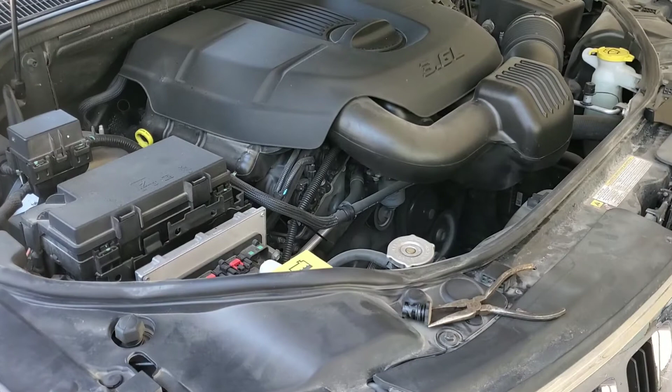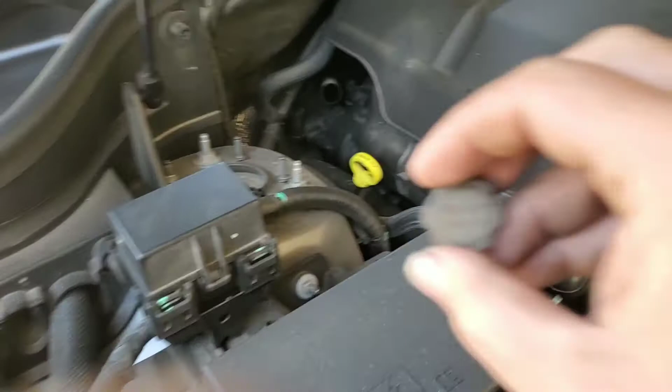Alright, well I got Mama to pop the hood, and you can already see here what I've got going on. There's this plug. Here's where you check your oil, here's where you check your transmission fluid, and it says for dealer only, but today we're the dealer.

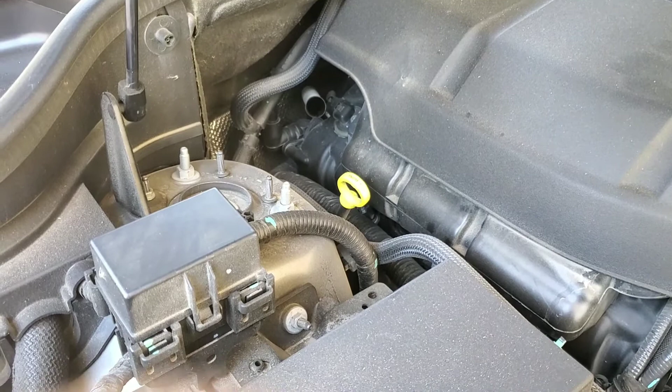So you just grab your handy dandy pliers, grab onto it, make a 1/4 turn, and then it pulls out. Mine popped out pretty easy, but I've heard of people who have theirs not pop out quite so easy.

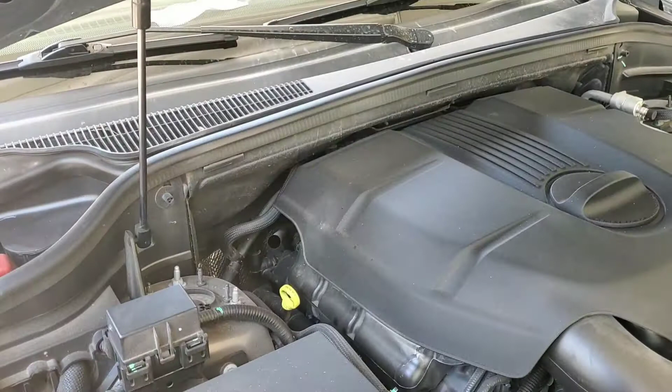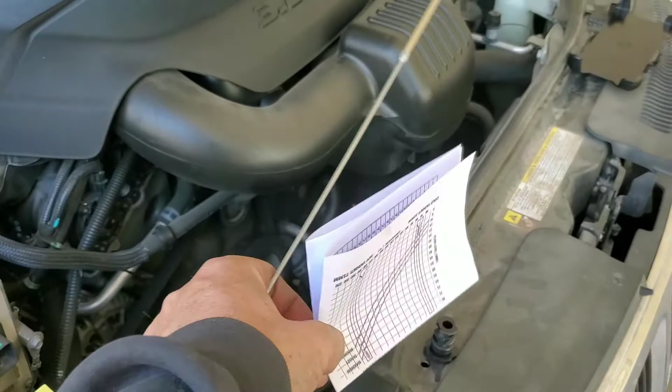Now obviously, as you can see, there is not a dipstick in that hole, but I ordered this one. It came with an instruction, well, kind of a chart. We'll get to the chart in a second. I ordered this one off the internet for $13, and what it's got to be able to read is in millimeters.

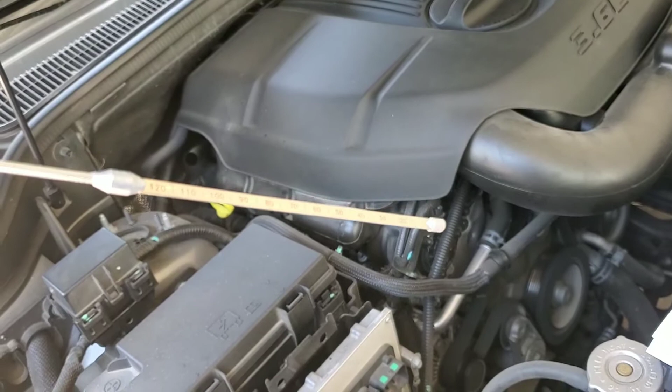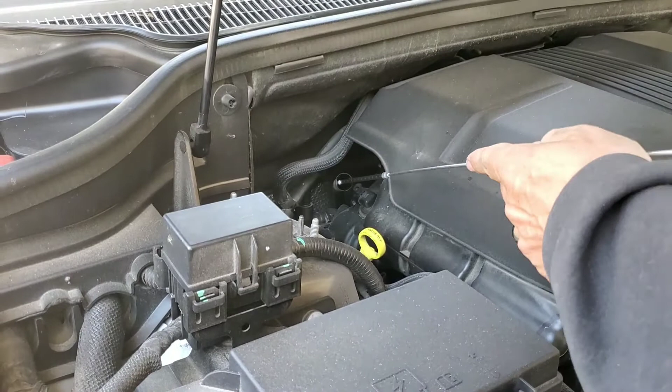So we're gonna give it a good wipe off, and we're gonna stick it down in there. It's got a pretty long cable on it. We're just gonna put it all the way in there until you feel it hit bottom.

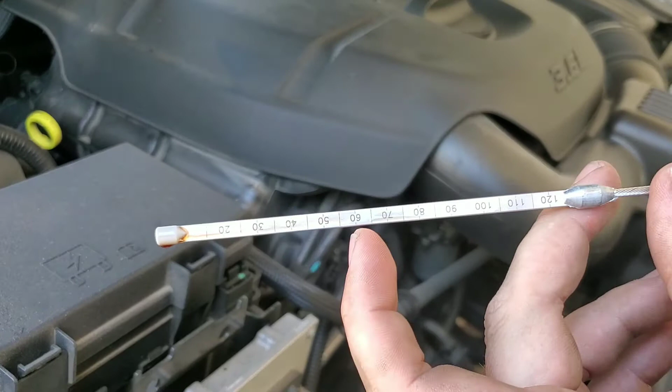The vehicle needs to be running. Your transmission needs to be kind of warm, or at least it helps. Alright, we hit bottom there. So we'll pull this thing back out, see how she reads. Oh, she reads right there to 60.

Now we bust out that handy dandy chart from earlier. So we got our instruction sheet that came with the dipstick, and we can see on here, you know, there's our Grand Cherokee with the Nag1 W5A580. We're supposed to use chart C.

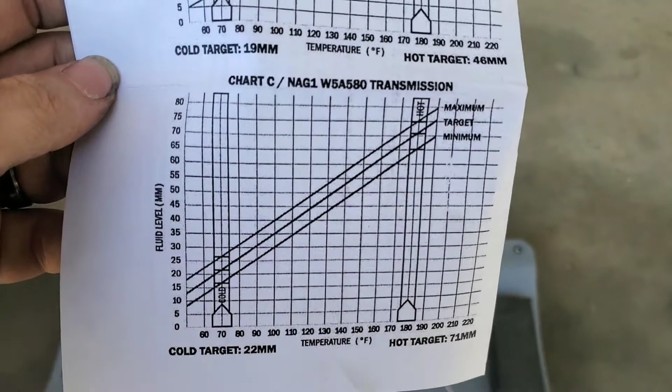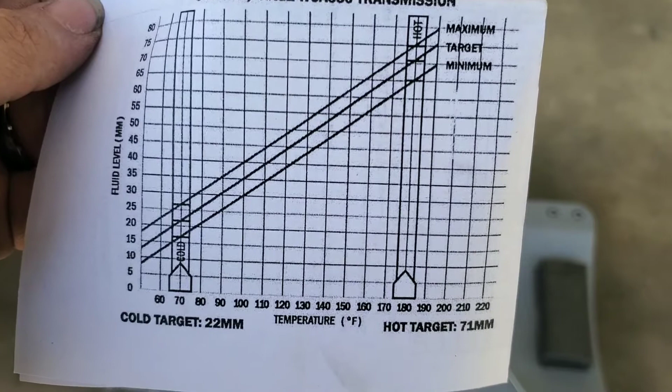And so we found our chart C here, and it's funny because it has our transmission labeled on there. We can look across the bottom, and it has the transmission temperature across the bottom, and then the fluid level in millimeters across the side here. So this is the part where we have to find out our transmission temperature.

And so we've got Mama over here sitting in the Jeep. Say hi, Mama. Hi. Oh, hi. Say hi, Frenchie Dog. Yeah, hello.

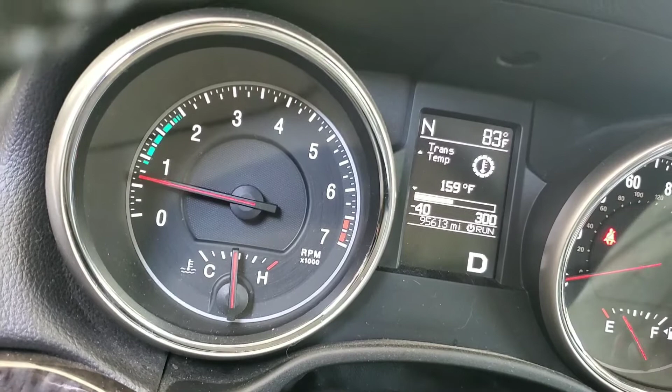Alright, so in here on the dash, you can see it says transmission temperature, but you have to shift into drive for the transmission temperature to show. So you put your foot on the brake, Mama. We got the park brake on. And look at that, 159. Alright, thank you, Mama.

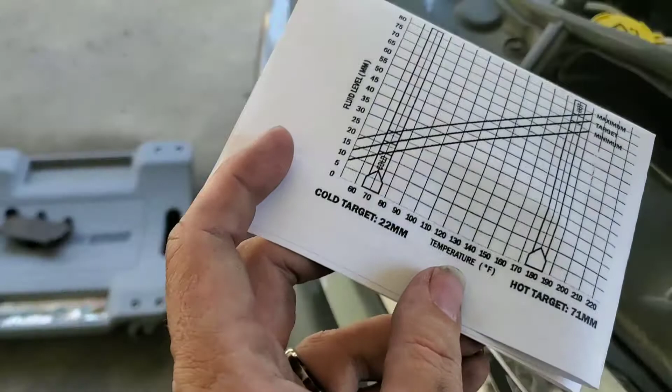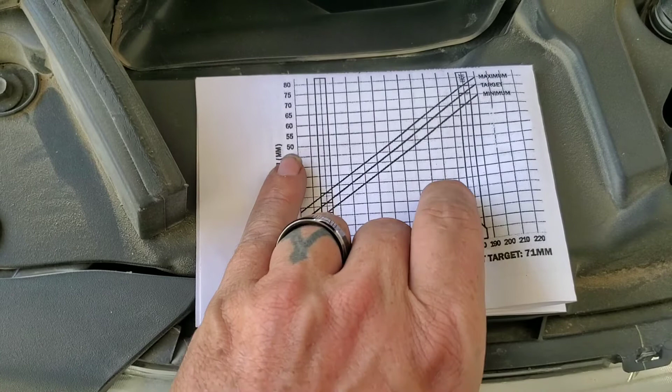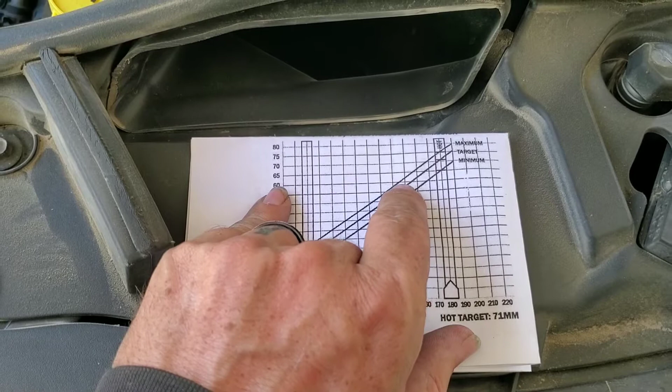And so from there, we refer back to our chart. Let's see here, we come over, we got 160 right here, and then we need 60 millimeters, which is what we measured to. There's our 160. So we come up and draw the lines together, and with that reading we are a tiny bit low, but we are fine within our spec range here. So our transmission's good to go.

So even though today my fluid was full, that doesn't mean that your fluid will be full. And so if you're low on fluid, if you go down to the dealership, you buy Mopar ATF plus 4, and that's exactly what it's spec'd out for.

I would personally use almost an eyedropper to add fluid, because I'd be so nervous, because that little tube right there is also the way you will have to remove the fluid if you overfill it. And that doesn't sound like any fun at all. I know that I don't have the tools to accomplish that, so I would just take it really easy, really slow, add a little bit, get a feel for it, and you'll learn your vehicle and be able to figure it out.